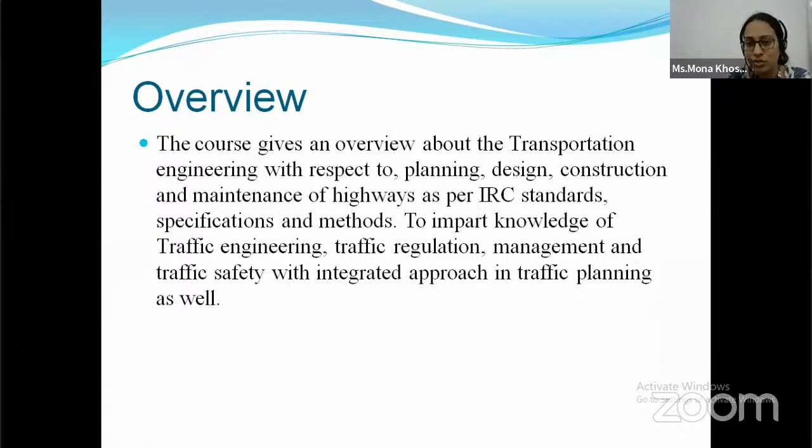It aims to impart knowledge of traffic engineering, traffic regulations, management, and traffic safety with an integrated approach to traffic planning. This is a very wide field in which we study the engineering, the regulations we have to follow on road transport, and management of traffic along with safety — this is all transportation engineering.

Highway development and planning — as traffic engineering is more wider in the highways, we need to concentrate first on highway development in India and the necessity for highway planning.

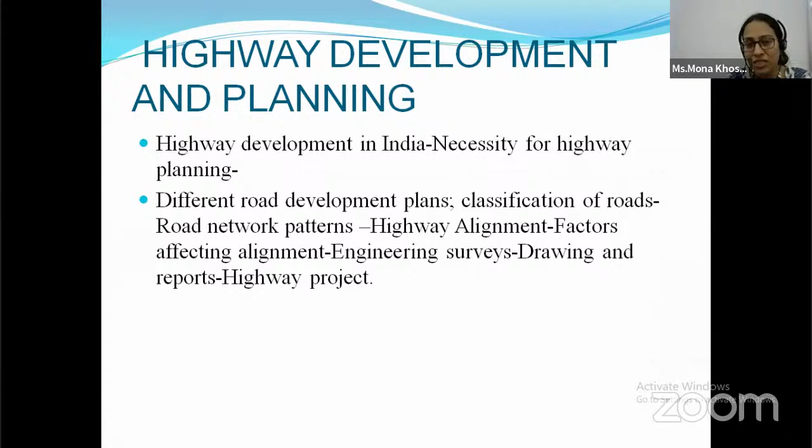In highway planning, there are different road plans we have to consider. The classifications of roads are different, roads are made on different network patterns, and their alignments are different. The factors include horizontal alignment and vertical alignment. For any type of road or highway construction, we first have to do surveys, and then define the drawings and reports. So this is all the highway development and planning we have to consider.

Now, what is the role of transportation? Why is it important? Because transport is linked to economic growth. Transport is a very wide field; it gives overall economic development in any country, place utility of goods, and time utility of goods, because products need to be sent timely from one place to another.

There are basically four types of transportation to choose from. Any transportation mode we choose should support economic growth and development of any country or state — place, time, producers and consumers, preservation of quality of goods, mass production, exploitation of natural resources, transport and urbanization, transport and industrial development, transport and agricultural development, cost of goods, administration, defense and strategic needs, tourism, transport facilities, and social activities.

Until and unless these roles are fulfilled in any transportation system — whether you choose airways, highways, or waterways — these are the roles that have to be fulfilled by all modes of transportation.

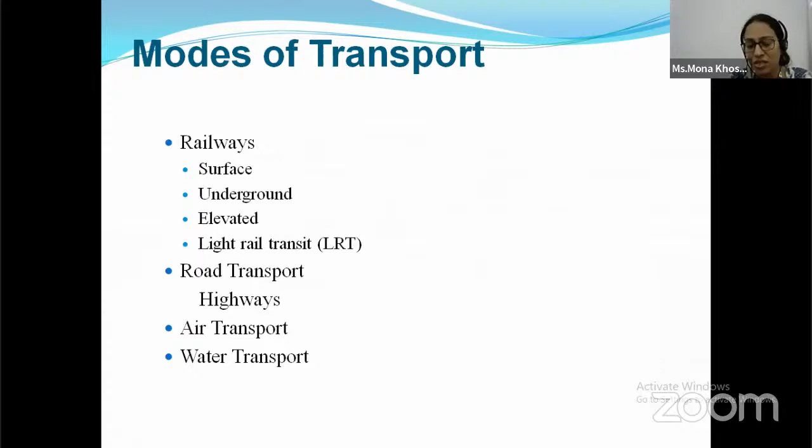What are the basic transport characteristics that define these modes of transport? Speed is one — in any transport system, especially highways, speed needs to be well defined. For example, national highways have different speed limits, state highways have different speed limits, and for expressways, the speed needs to be characterized first.

Other characteristics include safety concerns, adequacy, and frequency — whether the mode of transport, be it air transport or highways, has sufficient frequency. Also regularity, integration, responsibilities among members, cost, cheapness, and fuel efficiency. It's not that you choose any mode regardless of burden — fuel efficiency is also a very important characteristic.

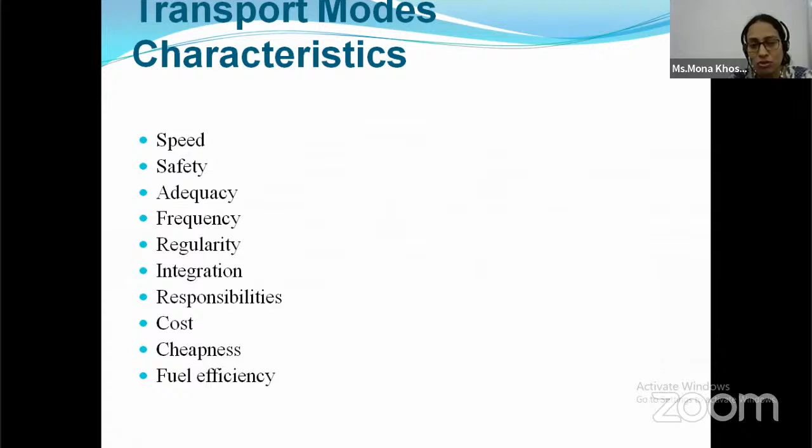Now, the transport modes in India are railways — the basic mode everyone uses — road transport, air and airline transport, and water transport.

Now there are some advantages and disadvantages of road transport. First, wide geographical coverage provided by the roads, and low capital investments are some of the advantages.

Quick and assured deliveries: you have door-to-door services, meaning with the help of road transport you can drop down from the bus, take a rickshaw, and reach your home. So there's door-to-door service, personalized service, and personalized travel where you can choose your own mode, like a bicycle or a car.

You can also choose short hauls, meaning whenever you want to pause or wait at any point of movement. This is not possible in railways or air transport; it is only possible when you are using road transport.

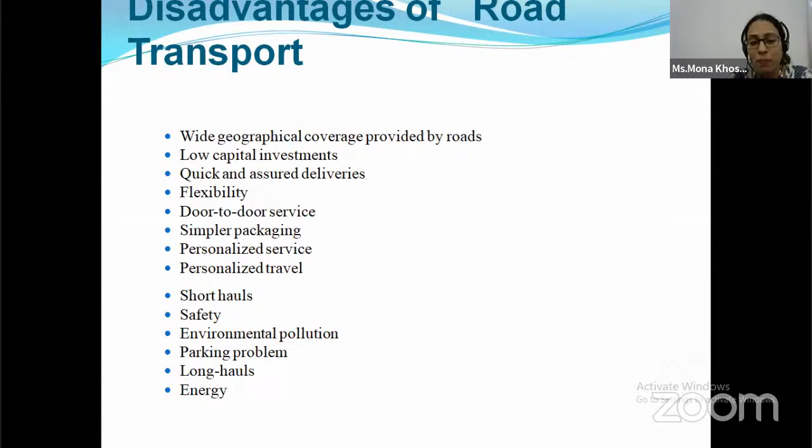Safety and environmental pollution are disadvantages. Other issues include parking problems, long hauls, energy use, connection to villages, communication in hilly terrains, and strategic importance.

Road transport carries freight and passengers as a feeder to other modes, and helps agriculture, dairy, forest, fisheries, tourism, etc. development. Tourism relies on a very wide network connected by road transport. People move here and there, which indirectly improves the economic development of any state.

It helps employment as well. It aids famine and food relief, since we can easily transfer products during such times. It also provides administrative conveniences. These are the roles of road transport.

In road transport there are different variations we need to study, different streams such as traffic engineering and management, transportation planning and management, road safety, transportation economics, and urban mass transit planning, management and operation.

Making a thing is very easy, but managing is the main concern. So we need to plan, manage, and operate for any type of transportation system we choose. Another stream is pavement material characterization.

Pavement material characterization involves the pavement, which is the surface above that you see. It may be a bitumen pavement, a cement concrete pavement, or an earthen road. So as per the area's specifications, we need to characterize the pavement materials.

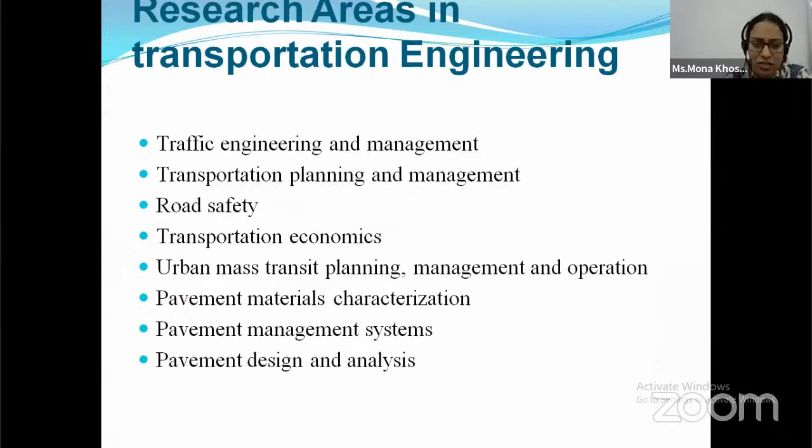Pavement design and analysis is a wide topic which you need to understand. Then there is the history of roads and highways.

First are the differences: expressways. Earlier we didn't have expressways; now there are expressways, highways, and road streets. In ancient times, animal-drawn vehicles were used as a mode of transport, followed by the invention of wheels, steam engines, and developments during Roman civilization.

As you understand, the first road was made in Roman civilization, then Persian and Chinese civilizations, the Indus Valley civilization, the Mauryas, Guptas, and the Mughal civilization. These are the different periods in which roads were developed.

During the British period, the road system in India was neglected. There was only some development during the British period, mainly for military and administrative purposes.

Then railways were introduced during the British period, with feeder roads built to support railways. During the construction of railway tracks, a committee was formed known as the Jayakar committee, the first committee developed to plan the development of roads.

Earlier, whole and sole control was under British rule. Then a committee was formed under Mr. M.R. Jayakar, which made a landmark in the planned development of roads in the year 1927. Under this, another committee called the Central Road Fund was established, which handled the funding for all road development.

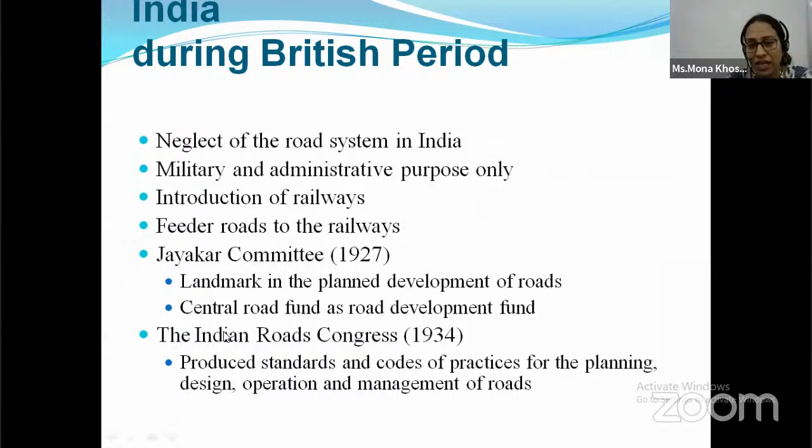The development of roads in India began with the first road plan made at Nagpur, considered the Nagpur Road Plan. Road plans were developed for 20-year periods. The first one started in 1943 and ended in 1963. It is called the Nagpur Road Plan because the committee held its conference at Nagpur.

The second 20-year road plan was the Bombay Road Plan, starting in 1961 before the first plan ended, and ending in 1981. The third road plan was the Lucknow Road Plan, from 1981 till 2001. After 2001, the next plan was the Road Development Plan Vision 2021.

In Vision 2021, the main motive was to create a quadrilateral network connecting the whole of India by developing roads including village roads, considered under PMGSY. We made the Pradhan Mantri Gram Sadak Yojana and connected all cities to villages, and this was our vision for 2021.

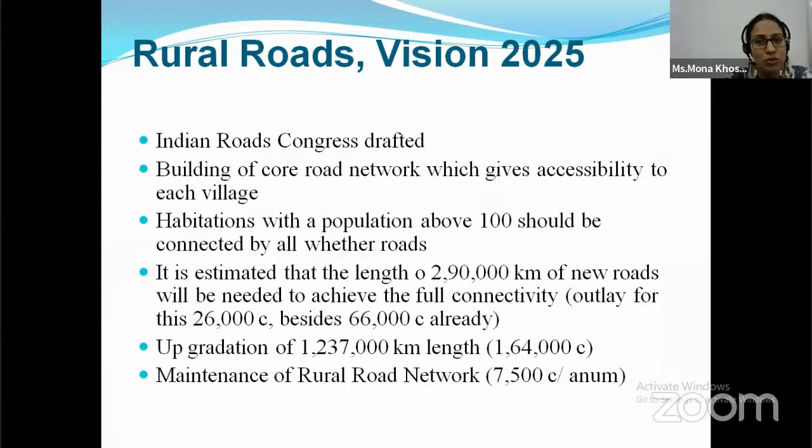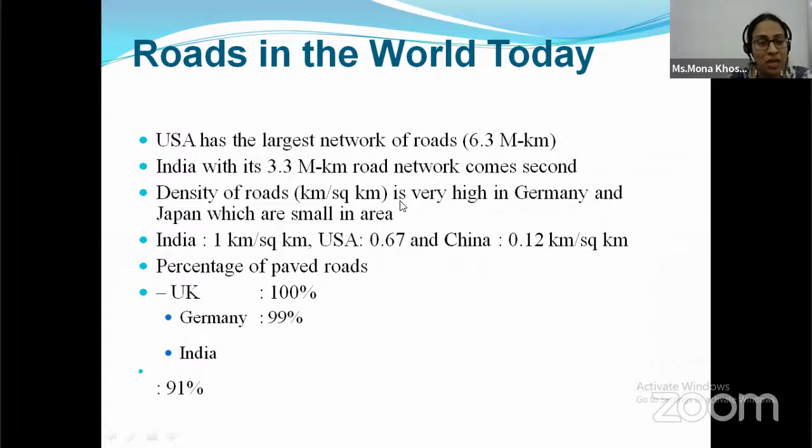Looking at roads in the world today, the US has the largest road network. India, with its 3.3 million kilometer road network, comes second. Road density per square kilometer is very high in Germany and Japan, which are small in area. So USA is first and India is in second position in the world road network.

Fundamentals of roads include administration of roads and appropriate design standards, since every road we plan has different design standards. We also need developing appropriate and integrated networks, connecting national highways, state highways, major district roads, other district roads, and village roads.

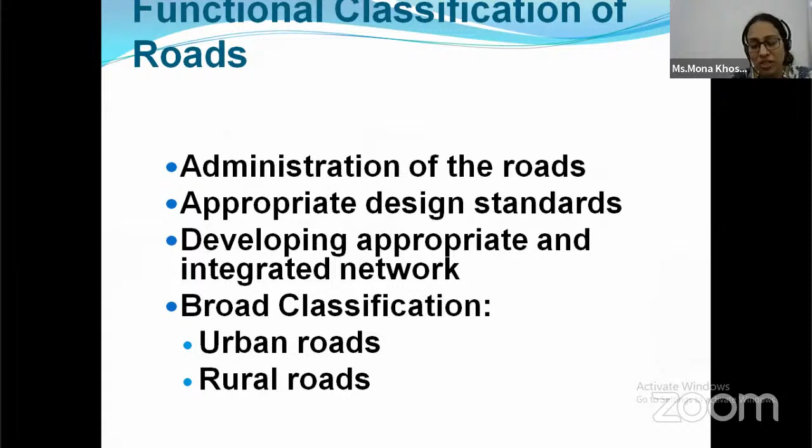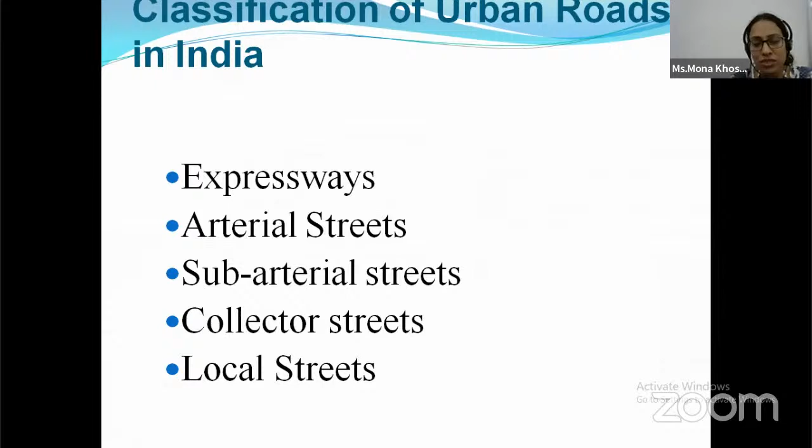Roads are classified by urban roads and rural roads. Classification of roads in India includes express highways and arterial roads. Arterial roads are the main roads connecting with other district roads and state highways. Sub-arterial roads and district roads connect to state highways, collector streets, and local streets. This is how roads are classified in India.

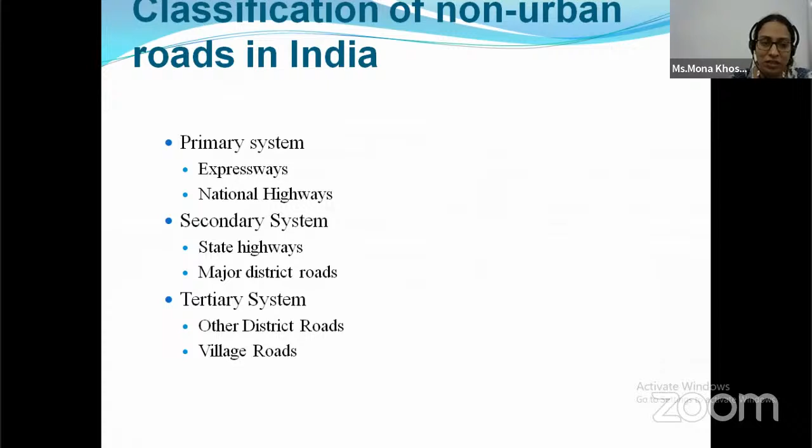Classification of roads in India is basically done by primary system, that is expressways and national highways; secondary system, state highways and major district roads; and tertiary system, other district roads and village roads. This classification was incorporated in the Lucknow Road Plan, the 20-year plan from 1981 to 2001.

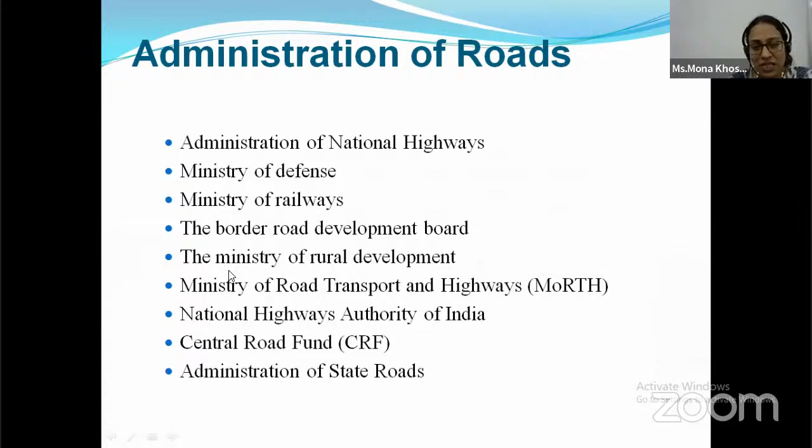Administration of national highways involves the Ministry of Defence, Ministry of Railways, Border Road Development Boards, Ministry of Rural Development, Ministry of Road Transport and Highways, and the National Highways Authority of India (NHAI), which you see written on banners. CRF, the Central Road Fund, provides funding for roads, along with administration of state roads through different boards, authorities, and rules.

For research in road development, key institutions include the Central Road Research Institute, State Highway Research Laboratories like the Highway Research Station in Chennai, Maharashtra Engineering Research Institute in Nashik, Gujarat Engineering Research Institute in Vadodara, Highway State Training Institute in Noida, and institutions like IITs, NITs, and BITs, where research work for higher studies on roads can be carried out.

Then the national development agencies which are under the road development plan are NRRDA, Pradhan Mantri Gram Sadak Yojana, PMGSY: connect every habitation with population of 1,000 persons through good all-weather roads. I've already explained what all-weather roads are. Connect every habitation with population of 500 persons.

The reason we are mentioning the population here is because the development of road is dependent on the population, the area of that population. For a national highway, the population area would be different. For a village road, the population area will be different. So according to the population, we develop the roads. Now it is habitation with population hundreds and connectivity to 1 lakh habitations. So this is the development which has to be done for the future.

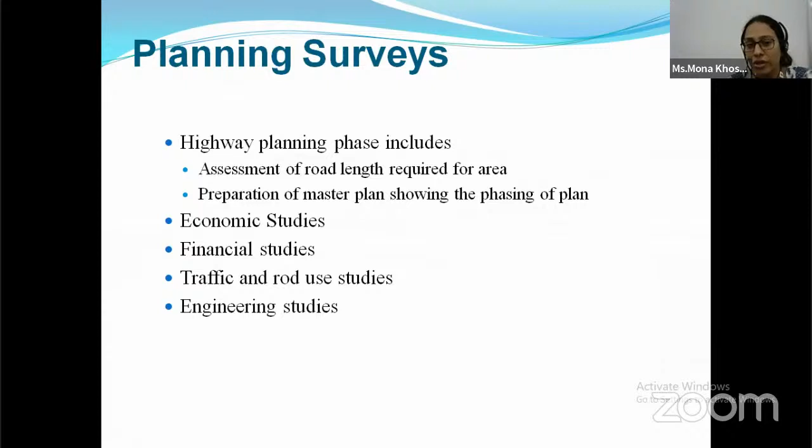Highway planning phases include assessment of road length required for that area, how much length we require for development of that road, like 30 kilometers, 50 kilometers, 100 kilometers. Preparation of the master plan showing the phasing of the plan. For every development, we need to show the plan that first we'll consider 10 kilometers, then after that 30 kilometers. Then the economic studies, financial studies, traffic and road use studies, and engineering studies. The design and the operations all come under engineering studies.

Then economic studies: the population. As I told you, for any road development, we need to consider population. So population and its distribution; village road populations are different and district road populations are different. Trend in population growth, whether the development is moving to urbanization, urban roads. Agriculture and industrial products, industrial and agricultural development and future trends, existing facilities with regard to communication, recreation, and education, per capita income, and vehicle ownership.

Suppose for a particular area the vehicle ownership was 500 at that time, but in future, looking at future development and future trends, the vehicle ownership would turn to 1500. So this also gives us the economic development. So we need to do economic studies for this. Then financial studies.

Sources of income and estimated revenue from taxation of road transport, how much taxation we need to employ, how much price for fuel we need to employ, living standards of the people, resources at local level, toll taxes, vehicle registrations and fines, future trends and financial aspects, public private partnerships like BOOT, BOT etc., incentives for investors, and other methods for raising funds.

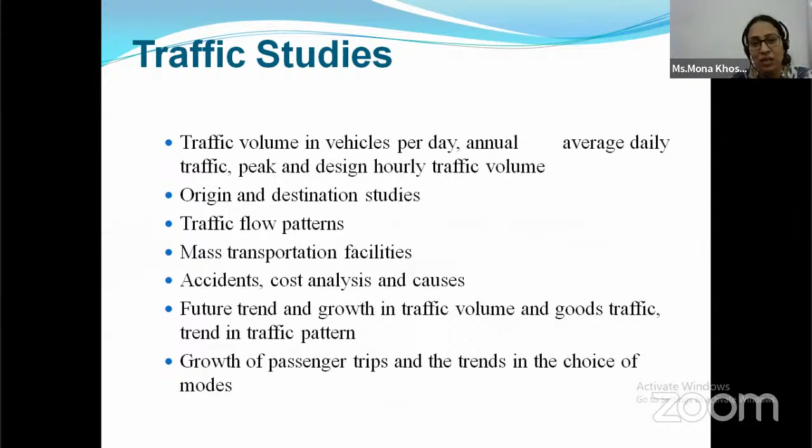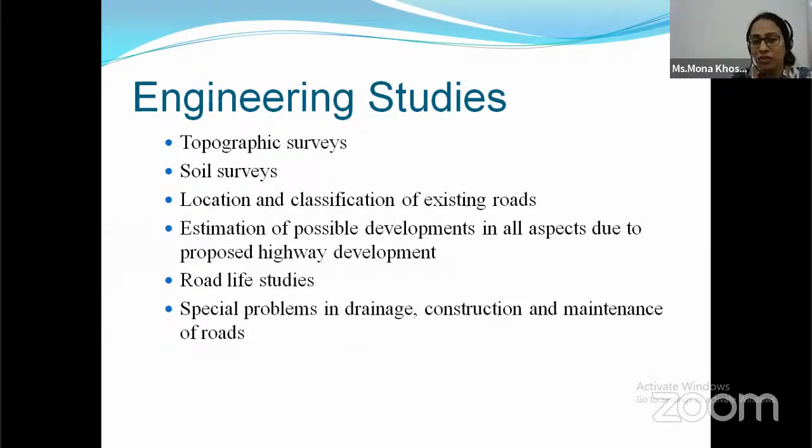Then engineering studies. In the engineering studies, first is the topographic survey. We need to understand that area, what type of topography is there; the soil survey, what type of soil is there. Accordingly, we need to design the pavement subbase. Location and classification of the existing road, how the roads can be connected to the other regions like state highways, major district roads, how we can connect the village roads to the ODR, other district road, or major district road. Estimation of possible development in all the aspects due to proposed highway development, road life studies, special problems in drainage, construction and maintenance of the road. So these all include the engineering studies.

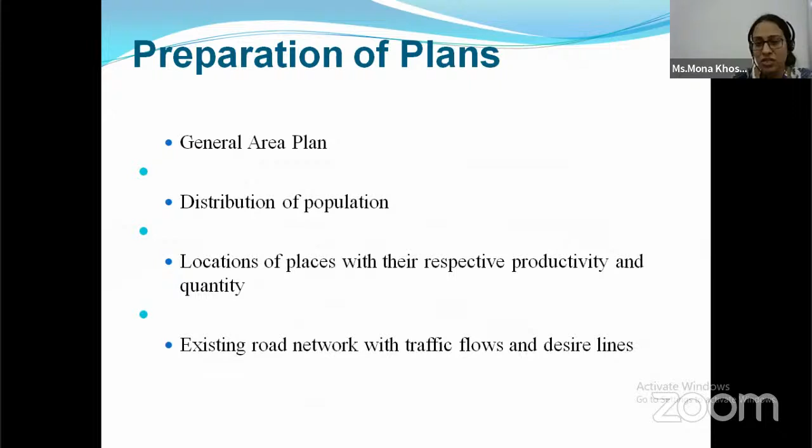And what are the areas we need for the preparation of the plans? Because we have studied everything, now we have to make the plans. So general area plan, distribution of the population, like the ranges: this area is having less than 500, 500 to 1000, then 1000 to 1500 or 2000. So this is how we can distribute the population to that area. Location of places with respective productivity and quantity, existing road network with traffic flow and desire lines.

Then development plans. So this was the first, Nagpur road plan, which I've told you. This was the first 20-year road development plan. It was started in the year 1943 and it ended in the year 1963. This was the first attempt to prepare a coordinated road development plan in a planned manner. The roads are divided into 4 classes: national highway, state highway, major district road and other district road. The committee which attended the conference at Nagpur planned to construct 2 lakh kilometers of road across the country within 20 years. They recommended the construction of star and grid pattern of roads throughout the country. Now, star and grid pattern, every road in the country has to choose a pattern. So here I'll explain in the next slide.

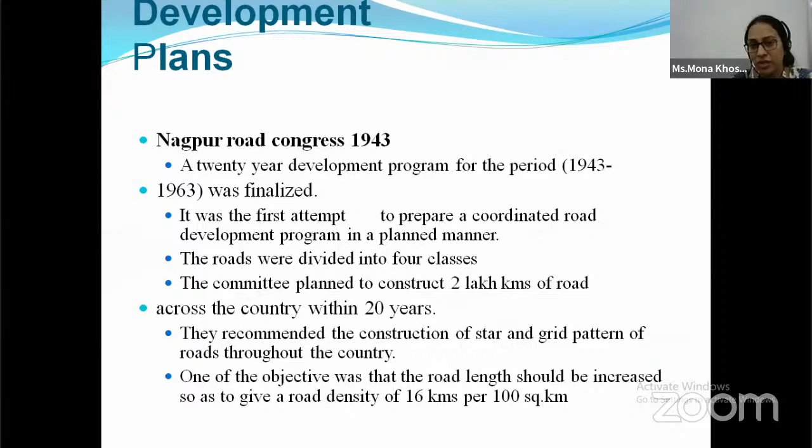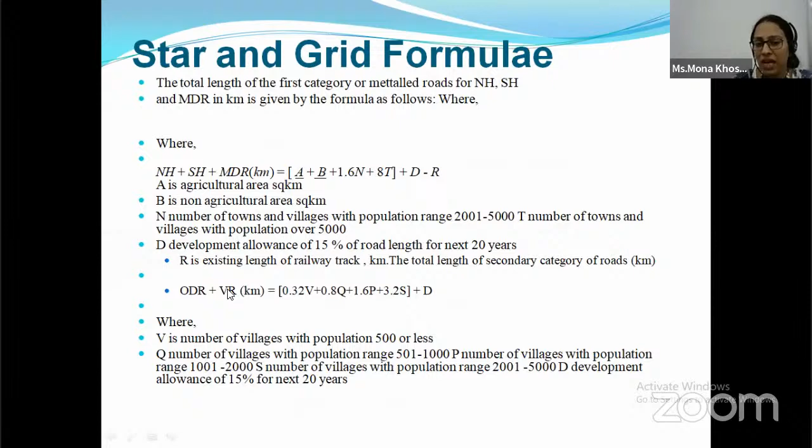Star and grid pattern: for the Nagpur road plan, we have chosen star and grid pattern. One of the objectives was that road length should be increased so as to give a road density of 16 kilometers per 100 square kilometers. So the star and grid pattern blocks which we had to make were 16 kilometers per 100 square kilometers. So this was the formula involved in this Nagpur road plan. The total length was first categorized as metalled road for national highway, state highway and major district road. We have two formulas under this Nagpur road plan. In the first formula, we have national highway, state highway, and major district road. And in the second formula, the other district road and village road were involved.

The next 20-year road plan was the Bombay Road Plan. This is considered the second 20-year road plan. It started in the year 1961 and ended in the year 1981. The total targeted length was 10 lakh kilometers. Rural roads were given specific attention. Scientific methods of construction were proposed for the rural roads. We hadn't used any scientific methods for the Nagpur road plan, but here we have used scientific methods for the construction of the road development plan. The necessary technical advice to the panchayats should be given by the state PWDs.

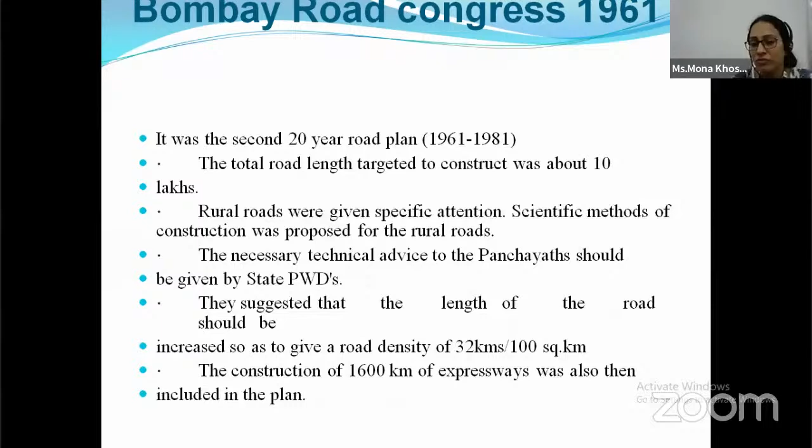They suggested the length of the road should increase so as to give a road density of 32 kilometers per 100 square kilometers. So here the development has been doubled. The density of road development was doubled from the Nagpur road plan: there it was 16 kilometers per 100 square kilometers, here it was 32 kilometers per 100 square kilometers. The construction of 1600 kilometers of expressway was also included in this plan. Then the third road plan, the 20-year road plan, was 1981 till 2001. It is called the Lucknow road plan because the committee held it at Lucknow. So they have given the name Lucknow road plan.

It aimed at constructing a road length of 12 lakh kilometers by the year 1981, resulting in the road density of 82 kilometers per 100 square kilometers. The plan has set the target length of national highway to be completed by the end of the 7th, 8th and 9th five-year plan period.

It aims at improving the transportation facilities in villages, towns, etc., such that no part of the country is farther than 50 kilometers from the national highway. So the ultimate goal of the Lucknow road plan was to connect all the villages to the national highways. The connectivity should not be farther than 50 kilometers from the national highway.

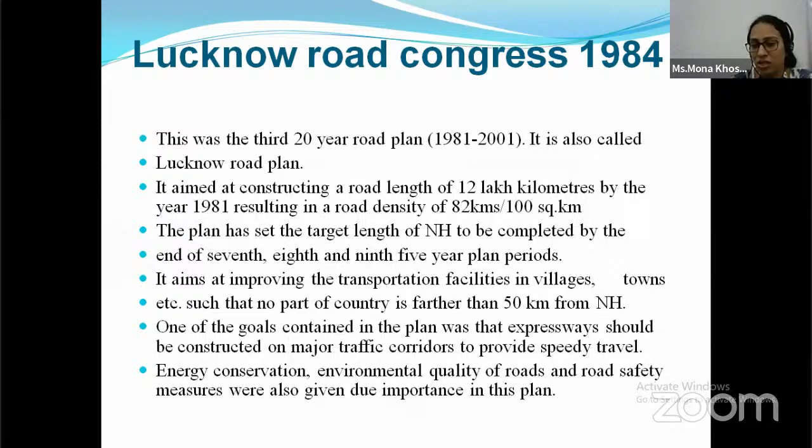One of the goals contained in the plan was that express highways should be constructed on major traffic corridors to provide speedy travel. So we have included the express highways for speedy travel and short hauls so that people can reach their destinations on time. So express highways were included in the Lucknow road plan. Energy conservation, environmental quality of the roads, and road safety measures were also given due importance in this plan. Now, this was the committee which was made.

Indian roads. India has a large road network of over 3.314 million kilometers of road, making it the third largest road network in the world. At 0.66 kilometers of highway per square kilometer of land, the density of India's highway network is higher than that of the United States and far higher than China's 0.16 or Brazil's 0.20.

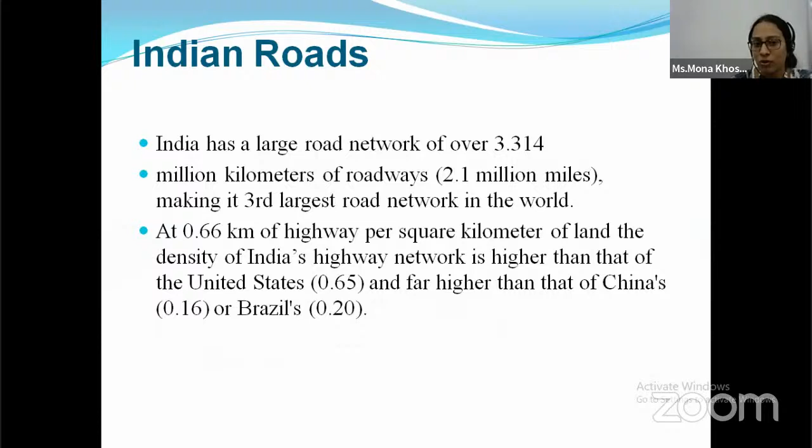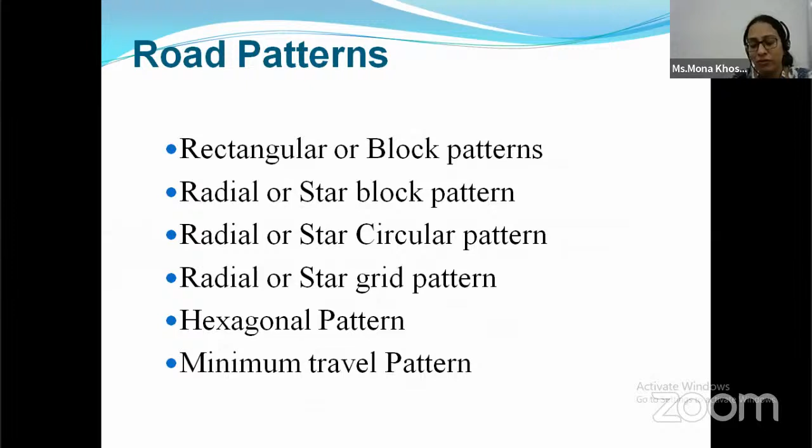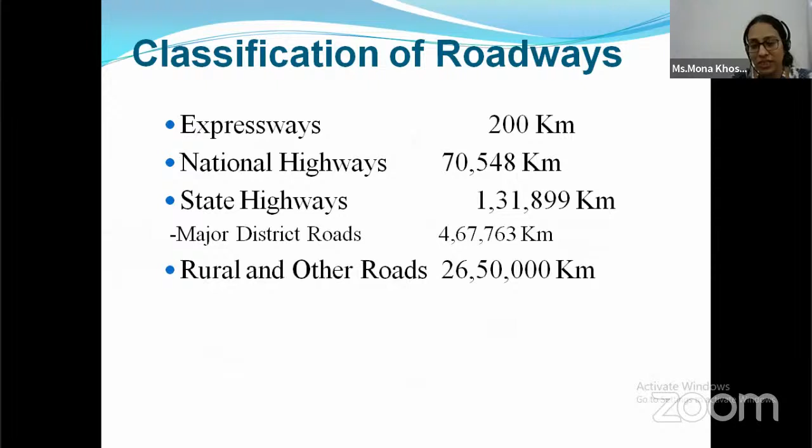The classification of the roadways is expressways 200 kilometers, national highways 70,000 kilometers, state highways 1,31,000 kilometers, major district roads, rural and other roadways. So this was all about the development of the road, how we consider the different road patterns, from where we started with the history of roads, the Roman roads, the Mughal roads, and now we have reached different technologies. We are using scientific methods of road development.

The next important topic is traffic in transportation engineering. The trend, direction, and pattern of traffic are critical elements for any transportation engineering. OD surveys, origin and destination surveys, should be conducted for any traffic analysis. Desire lines based on the survey should be drawn to indicate the desired pattern of traffic flow. So this is the traffic we need to understand for transportation engineering.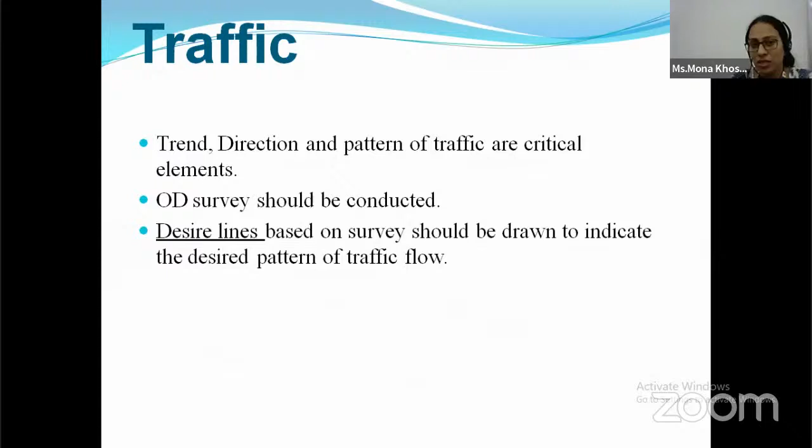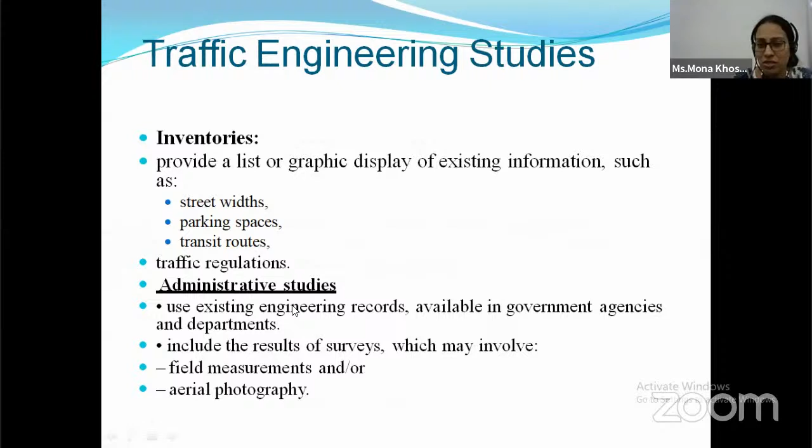Then administrative studies: use of existing engineering records available in government agencies and departments, including the results of surveys, which may involve field measurements and aerial photography. So this is the work of the administrative studies. Then dynamic traffic studies involve the collection of data under operational conditions and include studies of speed, traffic volume, travel time and delay, parking, and crashes.

So how do we do the dynamic studies? First we do spot speed studies. There are different types of studies, like origin and destination surveys and spot speed studies. Spot speed studies are conducted to estimate the distribution of speeds of vehicles in a stream of traffic, because people may drive at different speeds, so we need to understand it for the particular location or highway. They are used to establish parameters of traffic operations and controls.

The methods of conducting spot speed studies are manual or automatic: manual methods, automatic devices, road detectors, radar based, and the principle of electronics.